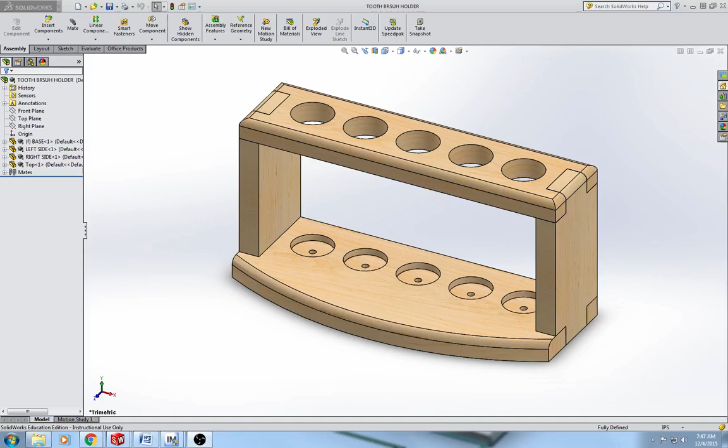You guys all have the 2D print of it. Here's the 2D print.

What we need to do today is lay out on the top of the toothbrush holder where the center of those holes go. We're going to lay out the mortise, which is this hole right here in the side that the tenons from the sides will lock into.

And then we're also going to draw the holes, or find the center of the holes and the mortise on each side of the bottom as well. Alright?

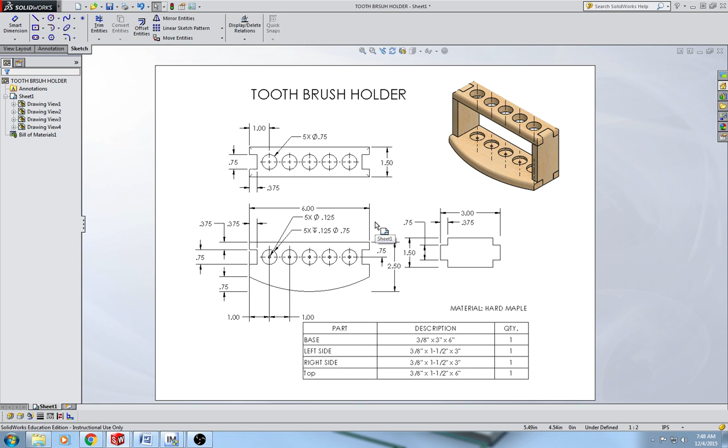You can keep that 2D print handy for reference if you need it.

Alright, so here's my finished one that I cut out yesterday. I drilled my holes and cut out one tenon, but I left one in so you guys can see what that looks like.

And then this is one step backwards - this is the same piece just with the holes laid out, and then this is one step backwards from that. It doesn't have the holes laid out, it just has the mortises drawn in.

And that's one step back from that. It's just the blank piece of wood that you guys have right now.

So we're going to go over here and we're going to end up here today on the third one. Cool? Cool.

So to get started, you're going to need a pencil, and you're going to need your small 3-inch piece, and you're going to need your small 6-inch piece, your 1.5 by 6 and your 1.5 by 3.

And a pencil, and hopefully it's a sharp pencil. If it's not a sharp pencil, you can go run out into the wood lab and sharpen it real quick and come back in.

Here's what the bottom looks like on our 2D print. It's 3/8 of an inch by 2.5 by 6, and it's exactly the same as it was up here. The only difference is that we're not going to be able to trace out the mortise as easily.

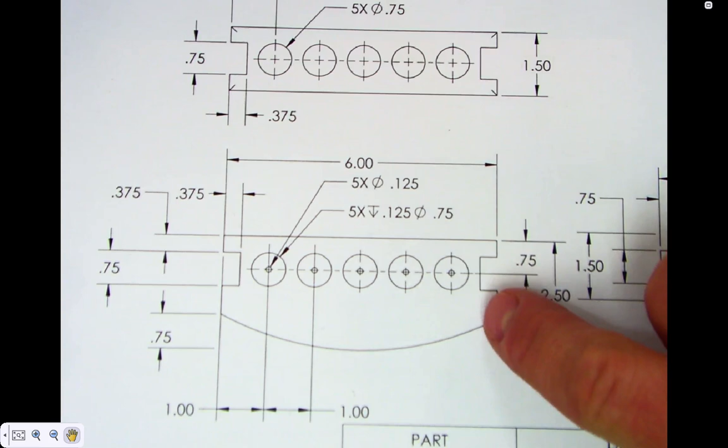We'll be able to get two sides, one side in the top of the mortise, but since the width is different, we're not going to be able to get that part of the mortise. So what we'll do is lay our top on top of our bottom and transfer the marks over. I'll show you how to do that.

Okay, so here's where we're going. This one's all drilled out and measured, marked. You can see it has 1/8 inch holes in there too, letting the water drain out.

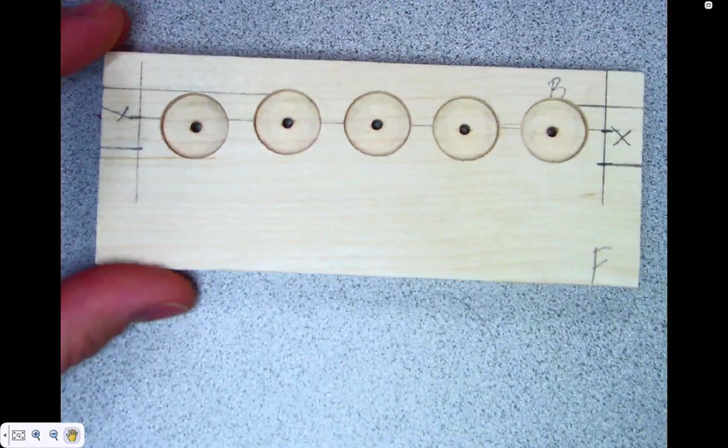We're also going to use those holes to secure it to the CNC machine when we do a little carving in there. I'm debating maybe even just cutting out the entire curve on the CNC machine, which would probably be a good idea because it would be perfect then. So maybe we'll just do that, and everybody gets to use the CNC machine, which would be pretty sweet.

And this is what we got right now. So let's go from here to here. All right.

What we're going to do is take our 3-inch board again, lay it down, and stand up our 2.5 inch wide board. You don't need to trace a line all the way across, just maybe an inch from the back.

So again, you're just going to stand up the board on its end, put the 3-inch long board up against it, flush them up, draw a line across about an inch in, and then do the same thing to the opposite end. But when you do it, make sure both lines you drew are on the back edge of that face.